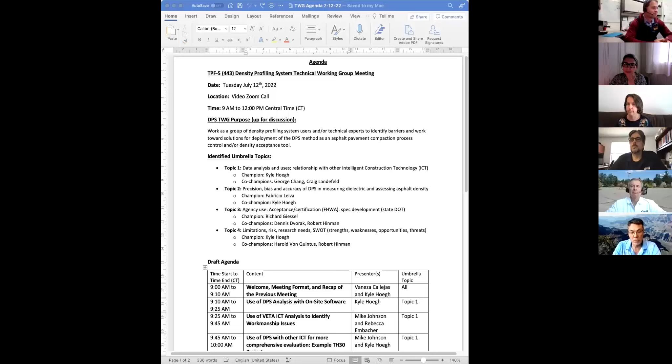Thanks Mercedes. Amanda. Hi, I'm Amanda Gilliland, and I am with the TransTech Group.

Thanks Amanda. Grant Courtney. Hi, I'm Grant. I'm a student worker under Kyle Hoegh and Mercedes.

Thanks Grant. Abbas. Abbas Tayavi from TransTech Group.

Thanks. Ulrich. I can't quite hear you.

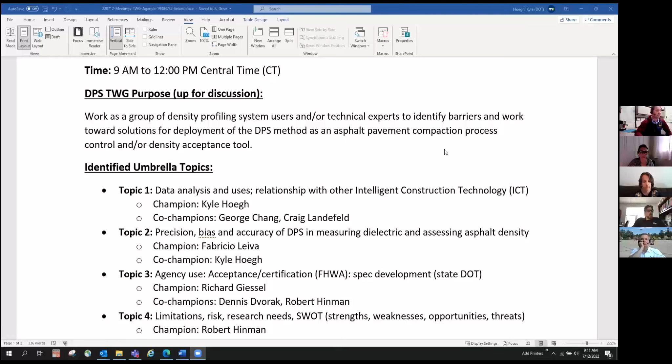Just a quick reminder that our goal is to work as a group of density profiling system users and technical experts to identify barriers and work towards solutions for deployment of the DPS method as an asphalt pavement compaction process control and/or density acceptance tool. In the last kickoff meeting, we did a polling exercise that CTC set up for us and identified these 4 topics, and then subsequently identified champions. So I'll be championing, along with George Chang and Craig Landefeld, the data analysis topic.

Fabricio Leiva from NCAT will be championing our precision and bias topic, topic number 2. Topic 3, Rich Giessel is our champion, and he's working with Dennis Dvorak and Robert Hinman. And then topic 4 is limitations, risk, research needs, strengths, weaknesses, opportunities, threats, and that'll be Robert Hinman championing that along with Harold Von Quintus and myself.

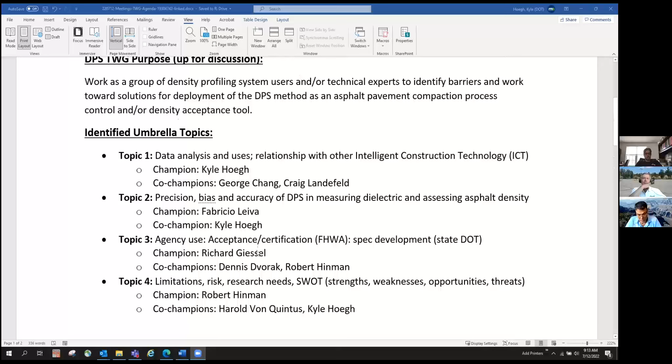So with that, I guess we could quickly open the recap from the previous meeting here. Let's see here. So a similar attendance to what we have today, I think around 30 or so of us. And we basically developed our purpose and identified, we had a couple presentations that Robert Hinman and I will be updating today.

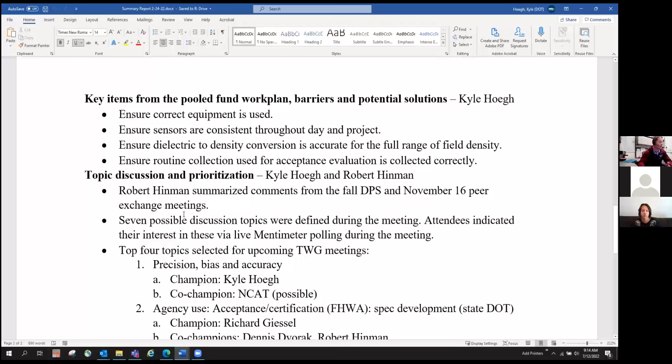But then the main point was identifying those 4 topics that I just shared with you. And then we came up with this meeting format where we're going to be focusing on specific topics with a presentation and discussion. And we'll discuss how that's working at the end of this meeting to see how we want to move forward to try to advance the technology.

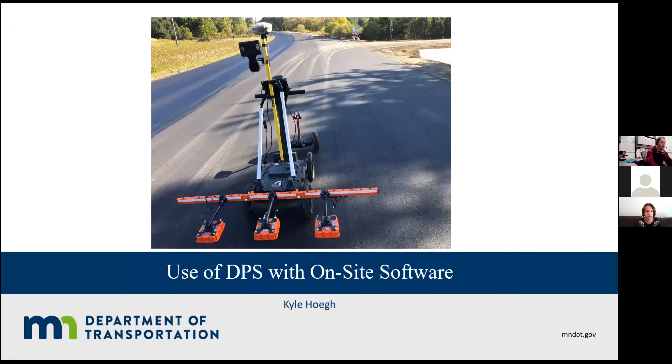So with that, I think we'll get into the presentations, and we're going to focus on topic 1 here initially, and that'll be myself, and then also Mike Johnson from Rebecca Embacher's group here will also be presenting as part of this topic. Okay, can you see my slide? Yes. Okay, so just to start with, before we get into some of the more advanced analysis that Mike Johnson is going to show, I wanted to first give an overview of the meat and potatoes of what we're trying to accomplish with DPS technology.

And really, it's pretty simple. We want a full coverage map of the placed asphalt density. And that can look similar to what we have here, which is a representation of the data in VETA or a Google KMZ file that is automatically created by the device each time you collect the data. But this is really what it boils down to: taking this device that measures dielectric continuously behind the final roller compactor and creating a map that gives us information about the density both across the width of the mat and longitudinally throughout the day.

So with that, Mike's going to get into some examples on this specific project and talk about how it ties in with some of the other intelligent construction technologies. This is just an example where paver stops manifest themselves in lower density locations, and then also looking a little more detailed at how variations of temperature throughout the mat, for example, can affect our density, but we're not going to go into detail of that yet.

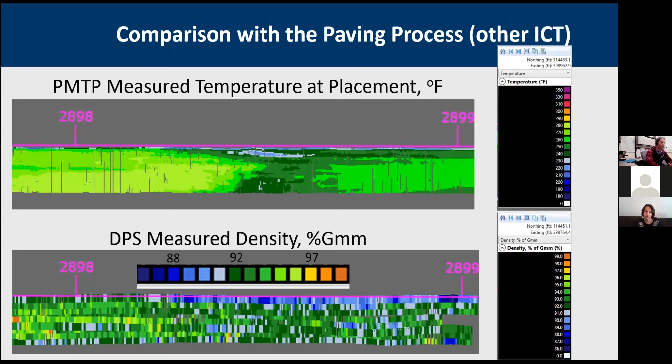One thing that's critical for this technology is training. This on-site analysis is something that could be very powerful for the use of this technology as a process control tool.

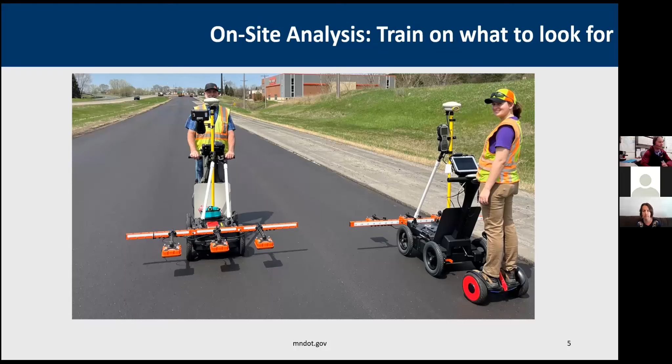I wanted to give this group an example of one of the first projects we were on this year, training a contractor on what to look for on the project and how this type of technology can be used with on-site feedback. We'll go into more detailed examples later.

What we've asked for as a group is the ability to take this technology and convert it to information that engineers are used to looking at when evaluating asphalt placed mat density. One of the tools developed with this technology is a simple way of categorizing the data so we can get a percent conforming result in real time while we're out there collecting the data.

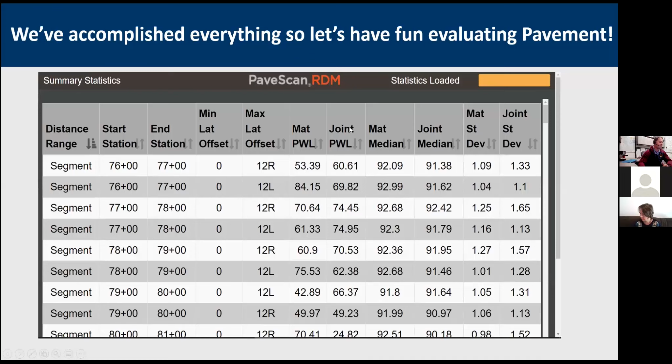I wanted to go through one example of how this type of information can be used. This percent conformance information can be categorized by mat or joint. At the beginning of the day, you'll see we're seeing a little bit lower than we'd like density on the right side of the longitudinal joint.

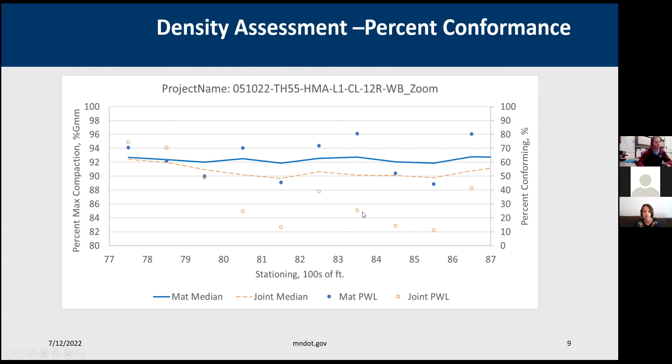One way we plot this: on the left side you see your average percent compaction for both the mat and the joint versus stationing. But more importantly, in my opinion, is what percentage of the mat and the joint is actually conforming to our standards for density. You see down around 10-20% in some cases here at the beginning of the day, around stations 83 through 86 especially, we're getting really low percent conformance at the joint.

Now let's move forward a little towards the end of the day and look at that data. This is what we started to see towards the end of the day, which is what we want to see: a higher percentage of our joint conforming to our standards for what we consider acceptable.

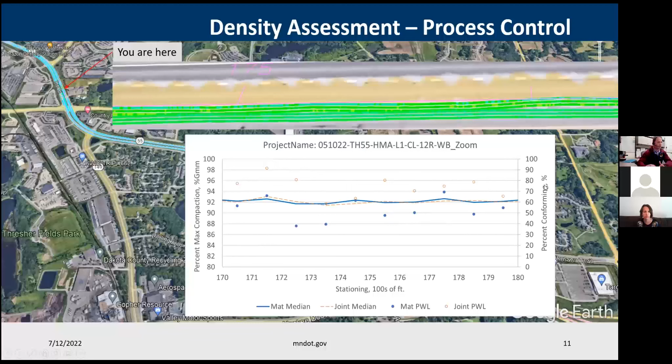So the question is, what changed? One thing I'll point out is that yes, we can do these fancy maps and do our analysis after the fact, but some of this information is readily available right away when you get out there with the technology.

This is Doug, the contractor, his first day on the job, and we hired him to push the cart for us. Basically what we told Doug at the beginning of the day is you get these three squiggly lines associated with your sensors. If you see one of these squiggly lines drop below the other two, take a look at what sensor that is and realize that corresponds to a drop in density. This is actually the sensor that was showing these lower density spots corresponding to the measurement close to the longitudinal joint in the right lane.

And this is echelon paving too, so this is not something that we want to see.

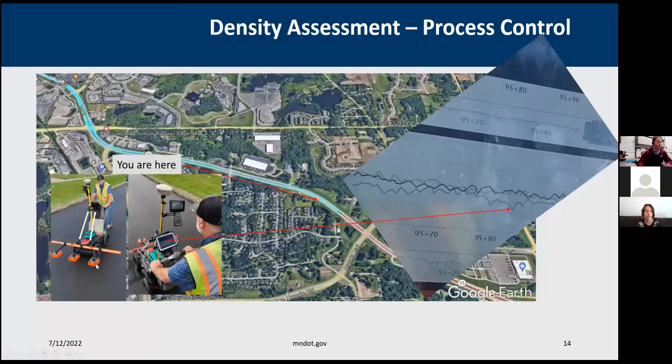So sure enough, the foreman came driving up and asked us, how are we doing today? How's our density looking? We explained that it looks really good, except for this spot on the right side of the longitudinal joint, and explained the data we're seeing coming in on the tablet. They took off and started talking to their breakdown roller operator and looking at their operation, and in this case I think maybe bridging across the lanes was causing that low spot.

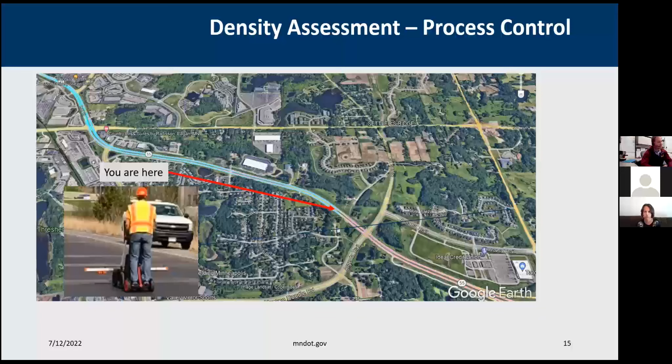But from our point of view, we don't really care what they changed in their operation. What we care about as an agency is that they changed from a really good mat, except for that specific location, to fixing even that spot that was showing low density on the right lane, right side of the joint on echelon paving.

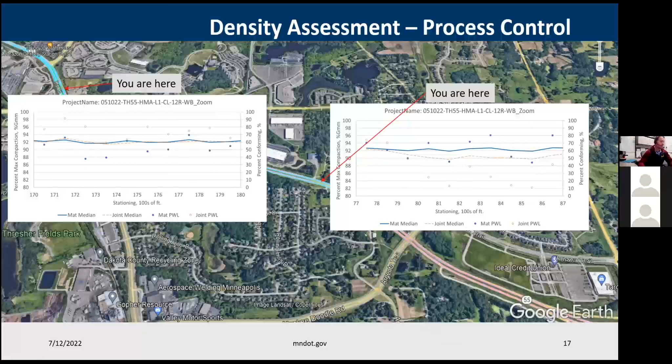That's just a small sample, a small change, but you can see this makes a huge difference on the percent conforming. I'd argue this makes a huge difference on how long that pavement is going to last, and who knows if and when that change would have been made without this type of technology readily available.

This is something a first-time user of this technology can readily identify. That's what I wanted to emphasize: the value of this type of technology, and getting it in the hands of contractors to try to use it to improve our operations.

So Mike, we're going to introduce here now to give us a little more detailed analysis, and this is more stuff we can do after the fact. This is looking at a project where I saw lower density - again a pretty good project overall - but I started to see some lower density here, specifically in this area starting at around station 141.

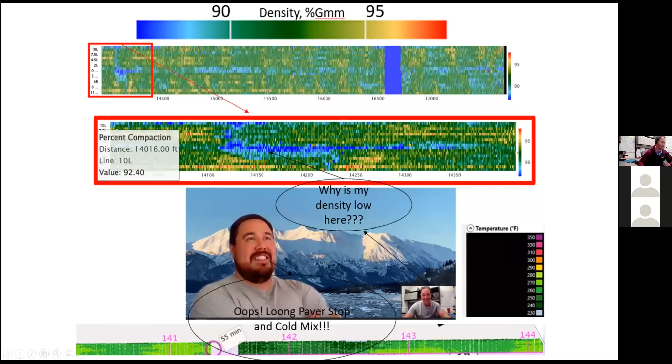Looking further into this data, you can actually see, in addition to this 55-minute paver stop, in the other lane a little 2-minute stop, and then a 49-minute stop. Sure enough, that also corresponds to the other issue we had with low density, down below 90% GMM, all the way across the joint here, corresponding with this paver stop, and all the way across the lane in both lanes, corresponding to these paver stops.

It can be further broken down to the temperature at the breakdown roller, where you see the low temperatures by the time the final roller - this is not something you want to see - by the time the breakdown roller actually got there. This is of course what we get when that happens in terms of low density occurring when we have a low temperature at the breakdown rollers.

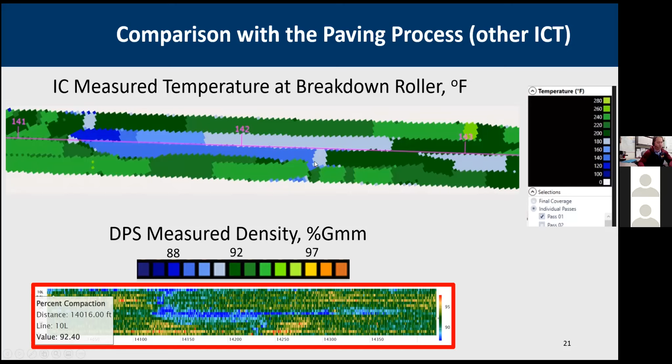So I want to thank you for your time with my presentation here, and then hand it over to Mike to talk a little more about the use of Veta, and then we'll bring everything together with DPS and Veta after that. I'm going to stop sharing my screen now and hand it over to you, Mike.

Okay, so I have a PowerPoint. We've been using intelligent compaction and paver-mount thermal profiling. We've been at full deployment for about 4 years, and since we've been using these technologies for quite a while, we've been able to identify cases of lower densities, and then we'll tie this into the dielectric profiling system data here.

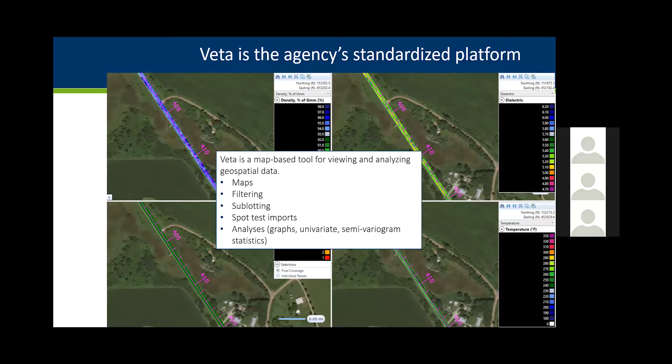Again, during the intros, I think George did a quick little intro on Veta, but I'll briefly touch on this as well. Originally we had several different intelligent construction technologies with a number of different vendors, so there was a need for one system to see all this data. Veta became that system - it's a standardized platform for viewing and analyzing geospatial data, with maps, filters, sublots, spot tests, and some analysis. I'm going to show you all those things here after the PowerPoint.

Okay, so the Veta software, what we have on the left here, as I mentioned before, are several technologies, the same colored bubbles. As long as that data is in the AASHTO MP39 format, or there's an API put together, it can go into Veta, and then we can view and do all the analysis on those technologies.

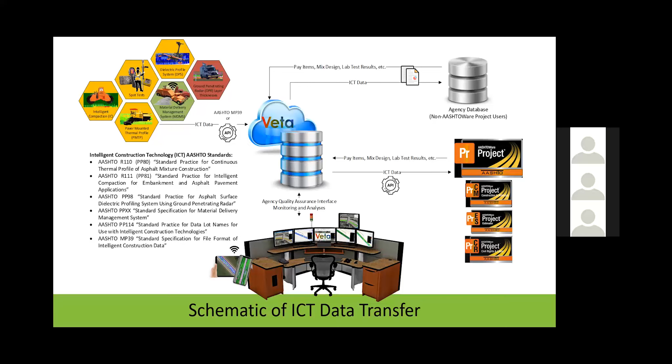So you've seen some screenshots from Kyle's presentation, several of them were from Veta. This is just another example here. As I mentioned before, paver mount thermal profiling and intelligent compaction are already technologies in the Veta software. Paver mount thermal profiling is in the middle, intelligent compaction here at the bottom.

And at the top, we're in the process of funding the material delivery management system. Sorry if I didn't explain it before, but that's the expanded version of e-ticketing. So once that's all in there, we have an opportunity to track the trucks, and it'll be a lot easier to identify changes in mix design.

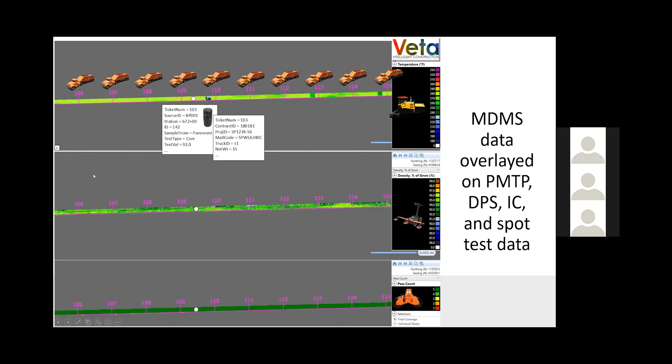Just a couple notes here: dump locations, and we can identify the moments when we need to adjust calibration curves, which is related to the DPS system. So having these other technologies in here will help you identify and also organize your DPS data.

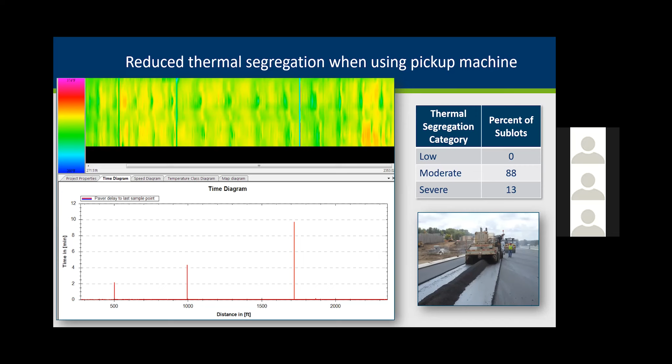We've been recommending for quite a while that contractors use a pickup machine or something to remix the material. On that same project, they grabbed a pickup machine and those paver stops became less of an issue. You can see significantly less variability in the paver mount thermal profiling data up top, and much shorter paver stop times. In this example, the worst one was only 10 minutes. You can see the difference.

So touching on this, I mean, most paver stops are preventable with changes to the operation.

We were able to identify some instances where we had increased localized area roughness with our profile data, and then we went back and looked at our paver mount thermal profiling data, and we were able to line up almost perfectly some paver stops. Those were lining up in that instance, depending on the contractor's operation. Sometimes those are apparent and sometimes they're not. So it's not obvious out in the field when you will get an area of increased roughness or not.

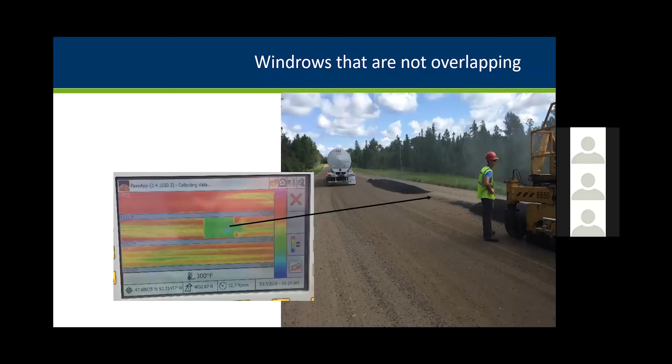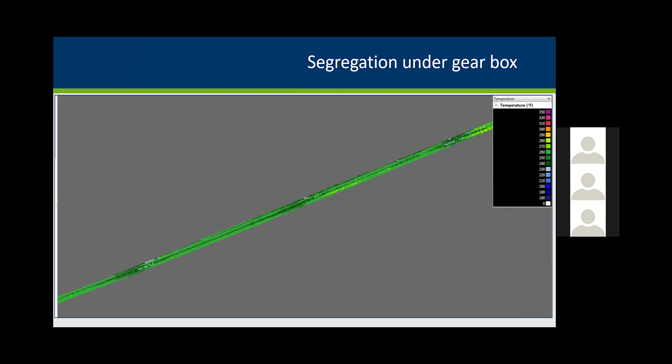Other issues we identified is segregation under the gearbox. As that material is fed through the paver, it goes down 2 slat conveyors, and then the gearbox pushes it out in front of the screed. What you see is that there's this strip of cooler material that ends up sitting right there at the center where the gearbox is. This screenshot shows you right down the middle, there's a strip of cooler material.

Other instances we've identified is trucks driving over the windrows. This pushes that material down, the pickup machine can't pick it up as well, and then you don't get full thickness of the lift - some cool material mixes or gets paved over. What happens is that you get some cooler material show up here in the mat.

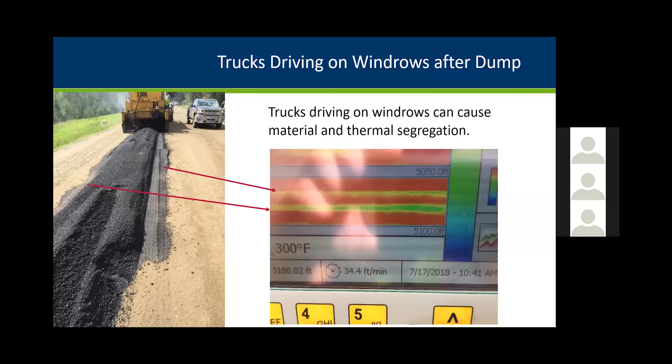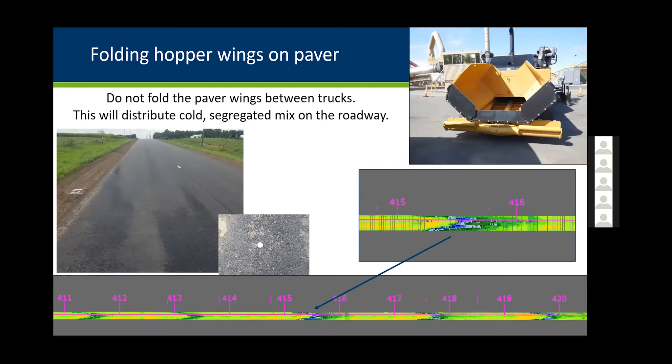Folding of paver wings - we see this. I've seen it driving down the roads a number of times. What happens is cooler material collects on the side of the hopper. At the end of a load or a dump, they'll fold the wings, and that colder material will go through the paver and turn into this V shape in the thermal data, as you can see in the zoomed-in version on the right, and overall on the left. These may be visible, and you can even see in the zoomed-in picture with a quarter where you could see the aggregate.

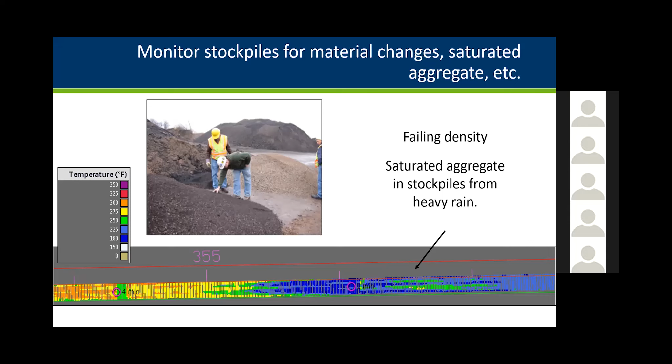Similar deal, this is a rain that happened overnight, and then a stockpile got saturated. At the plant, they just picked up that saturated stockpile and sent it through the plant, and that saturated aggregate did not warm up and did not make it to the site at a reasonable temperature.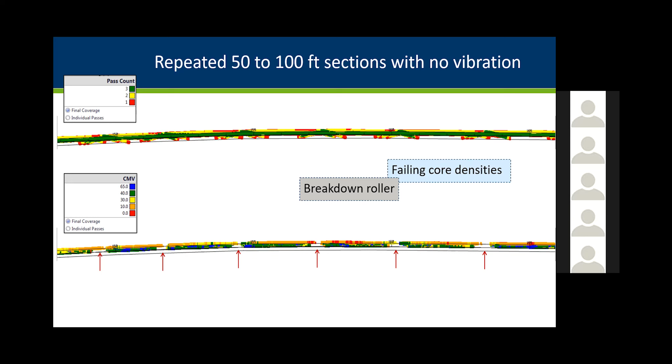instruments on that intelligent construction roller, one is the stiffness values we're receiving. In this instance, it's in CMV units. And what happened is these areas where there's no color indicates there was no vibratory compaction occurring. So as the roller was compacting, they'd turn off the vibes and roll off, and then they'd roll back on and turn the vibration back on. What happened is these areas never got hit with vibration, and they corresponded with some failing cores.

Other issues we've observed is just the rolling operation itself. With this system, there is a screen that the operator can see, and they can see where they've rolled, instantaneously mapped. But prior to that, these contractors, an operator would start compacting and go until they see the first tumbleweed, and they'd stop and go back to another preset area, back and forth. And over time they miss areas.

You could see that this example here on the top is the number of passes that this breakdown roller had. There's a number of areas, especially towards center line, where there was only one pass by the breakdown roller. So it's going to be challenging to get density when there's only one pass from the breakdown roller.

Other examples we've had: up in the top left is some asphalt that failed, and that was fairly immediate - I guess there's no striping there, so it was immediately after construction. This asphalt just started failing, and what you could see with this Veta software is you can turn on the aerial map, and you could see that this road went through a boggy marsh area. Based off of the legend on the top right, this Trimble CMV is a stiffness value, so there was significantly lower stiffness values in this stretch, and that corresponds to the failure area.

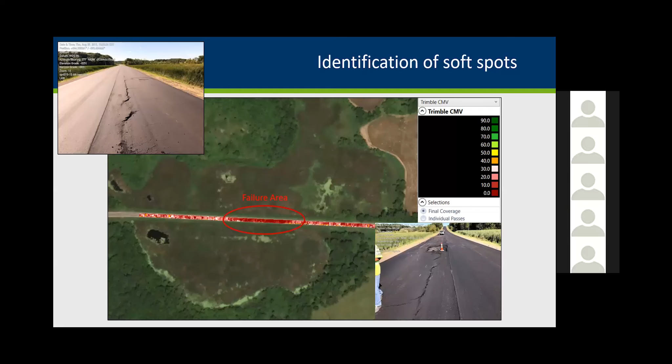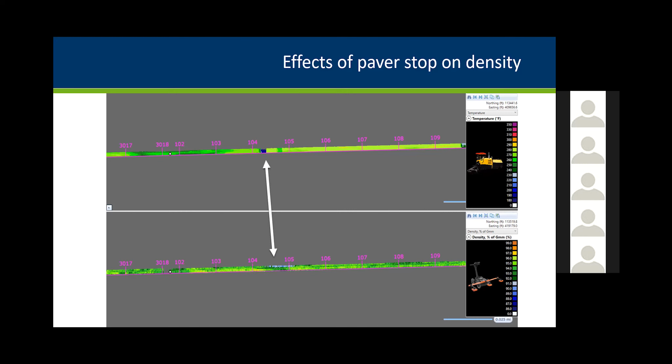And then I think Kyle had some similar screenshots here, but basically paver stop at the top and then lower density on the dielectric profiling system here in the bottom. That reoccurred over and over. I think Kyle had this screenshot, and then Kyle had a zoomed in version of this left one right here as well.

So that's just about the end. Again, more correlations of paver mount thermal profiling data, and then lower density in the dielectric profiling system.

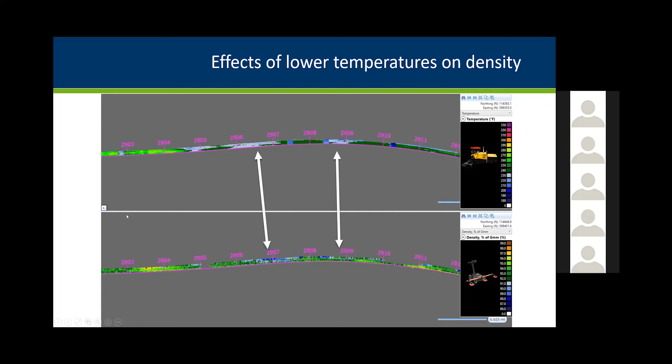Let me bring over my Veta software. Haven't been paying attention to the time, but hopefully in 10 or 15 minutes before this Zoom meeting gets cut off again. This is one of the projects. Well, hey Mike, actually, we're back in business with the Zoom meeting. Oh, so we don't have to worry about that anymore. Okay, well that's great news.

Yep, all right, so this is the Veta software. This is one of the projects where we had intelligent compaction, paver mount thermal profiling, and either Kyle or someone on his team, or even they hired out a contractor, to collect DPS data here. So this is in the Veta software. There's all sorts of other classes and training that TransTech Group can provide about creating these filters and taking care of the data and importing it all. There's a number of steps to get to this process, is all I'm saying.

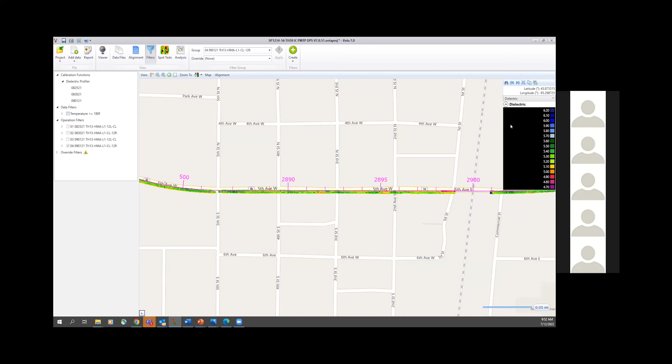Right now, bring your attention to the legend in the top right. We have pure dielectric data here, and I can switch to instantly view dielectric values on the viewer. Kyle had calibrations that he provided to us, which we can now use to get density values. There's also a number of other options we can look at: dielectric height, quality, speed of collection, and the opposite of density, air voids. So that's what we're seeing on this screen.

One note for the group: if you look at that legend, it's the opposite of what a lot of you are used to with density, where in this case the cooler colors are higher density and the warmer colors, the reddish and orangish, are lower. This legend is fully customizable, I can add as many increments as I want. Part of the challenge is making the color scale make sense when you actually see it in the viewer. So blue is good, red is bad. That's what we're looking at right now.

Can I add on to that? Kyle and I inverted the scale this direction because it was extremely confusing looking at the DPS data with respect to thermal data and intelligent compaction data when the color scales were inverted from each other. It's a lot easier to pan through temperatures for thermal profiling and intelligent compaction, and then also look at the DPS when the color palettes match. That's why we inverted it, otherwise you had to keep flipping it in your head as you looked at each one, figuring out what was more of a concern versus less of a concern.

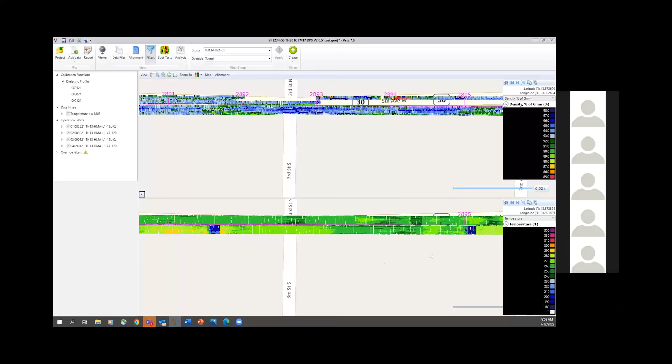I have one more thing I got to point out here, and then I think I got to move to analysis here before I run out of time.

So again, down here on the thermal data, what we have is there's this cooler strip of data on the edge. And then up here on the DPS data, you can see the corresponding lower DPS values. So again, there's some good correlations here.

These were just a couple examples that I had ready to go this time.

These are all the different data types that we can view based on the technology. So again, I went over the list for dielectric profiler system, but for the thermal profiling, we got speed and temperature. And then for the compactor, we got pass count, speed, temperature change, stiffness, frequency, amplitude, impacts per foot. So we could see all these different data types, and right here in the Veta software, do our comparison.

So I'm going to switch to analysis here and show that to you before we stop. And I think I have this preloaded here. One of the suggestions we had was just the

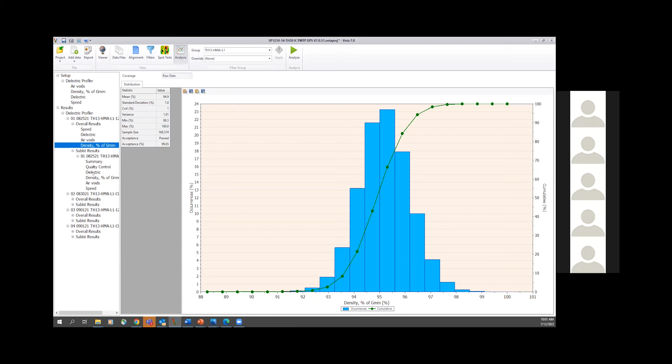This software can also slice and dice these entire lots into what we call sublots. I had the settings at 150 feet, which matches our paver mount thermal profiling. So I can go here and now I can view

Oh, there's no DPS data for that first little bit. But I could view this DPS data here. So this red rectangle here indicates the sublot that I'm looking at based on the chart that I have.

And we have, this is the percent within limits that this one passed. It was 99.8% of the dielectric data was over the 92% threshold. So, and then again, the statistics on min, max, mean of the densities.

And then we can get a chart of the acceptance. Again, this first 8,000 feet, there is no DPS data to make the comparison. But over here, there is DPS data, and it was all of these 150-foot sublots that passed our test here.

So some of these other lots are not so much. So I can see that, you know, we have a number of, each bar is 150 feet. So there's a number of sublots that just didn't have the 92%. So I can see that same information here in the table and scroll down. So this was 78. Only 78% was above 92, had a density of 92 or higher.

So sorry, I keep lots of percentages here, but you can kind of see just on the viewer, there's more variability in the densities based on the legend here on the right.

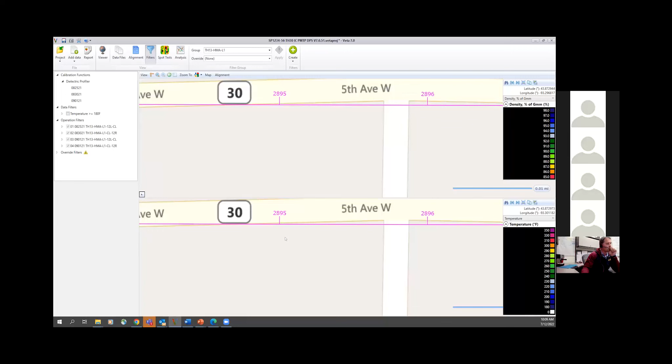But I think we are getting the accuracy left, right. There are some vendors where the receiver compared to where the data is scanned is shifted, so there might be some longitudinal differences in the data. If I scrolled over to those paver stops, you'd see the paver stop for thermal was at 2895, and then you could see it's almost an additional 10 feet shifted for the DPS. So there is a little bit of longitudinal difference for our thermal data.

But now that all these technologies are compared to each other, we're starting to see a little bit more of those differences, but independently that isn't impacting our incentives, disincentives, and requirements for any individual technology.

So the other question Rich Giesel had is, what is dielectric height? That's just the height above the pavement that the sensors are. The reason that's included is if you have a height that's out of tolerance in terms of the distance between the sensor and the surface, that can affect our dielectric accuracy. So that's the reason we're tracking that.

And I forgot to ask Rob, did Mike and I answer your question? Yes. Okay, did a great job. Okay, and then Rich Giesel, how about your question? Does that make sense?

Yeah, I just would have called it sensor height, I guess. I wasn't connecting dielectric and height as the height of the sensor.

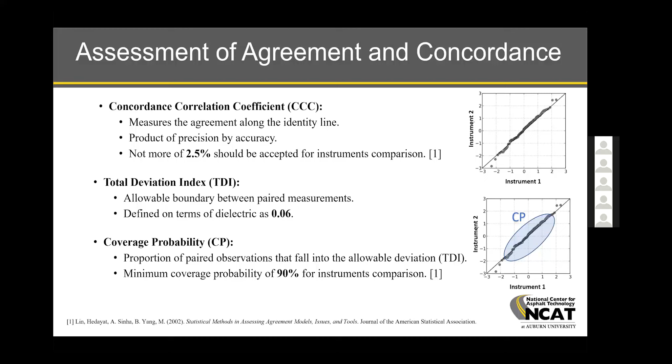In order to do that, we prepared compacted samples using two different mixtures. One was a 9.5 millimeter dense graded mix, and we also had a 19 millimeter coarse graded mix, just to have different mixtures we could compare for a wider spectrum of results. At the same time, we created compacted samples at four different levels: 3%, 6%, 9%, and 12%. For all of them, we obtained dielectric values following the standard protocol.

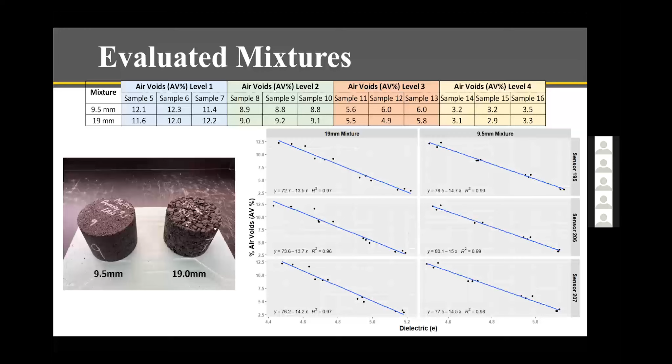Here I'm just going to show what we did initially with three different sensors we had available. We wanted to compare those two mixes, plus another trial mix we had in the lab that we used to learn how to operate the equipment. When comparing several of those sensors across all three mixes, we were able to meet all the parameters: we wanted to be above 97.5% on the concordance correlation, below 0.06 on the TDI index, and above 90% or 0.90 on coverage probability.

So basically what this is telling us is when we compare sensor 207 versus 206, or one sensor versus the other, across all three mixes, all of them were showing similarities in a statistically significant way that we were able to prove.

We did find out later on that the 19 millimeter mix was a little bit tricky to deal with. And then we decided to split the results. So now here I'm showing...

more sensors that we had at that time. We had later on 6, and then we sent those samples to MnDOT and Kyle's group. They were able to also test the same samples, and we added more. But here I'm showing 6 different sensors that we had, and we separated those 2 mixes.

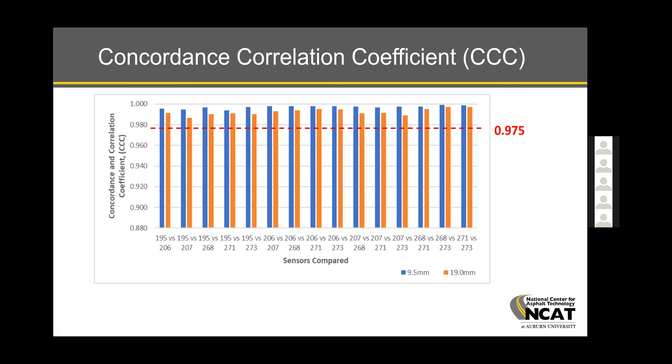And we noticed that the 19mm mix was showing us slightly lower results, and that sort of makes sense, because we were observing a little bit more variability on the results with the 19mm.

When we went and checked the total deviation index, we found a couple of instances where we pretty much failed one, and the other one was right at the range that we were expecting, and that led us to do more investigation of what was happening with those mixes.

And basically we found that at the high level of air voids, the 12%, we had several samples with a lot of variability, and it was difficult to obtain repeatable results.

We observed that with all the different sensors, and you can see that in most cases the 19mm was showing higher values, which in this case we don't want to go above 0.06. And for the 9.5mm, every single pair passed that criteria.

The coverage probability is going to show us the same results as before. In this case, it's more easy to identify that this pair also had an issue.

And again, we went back. It was the 19mm. We identified a couple of samples that were behaving differently. It was just that we couldn't get repeatable values, and we were thinking maybe it's the texture of the mix.

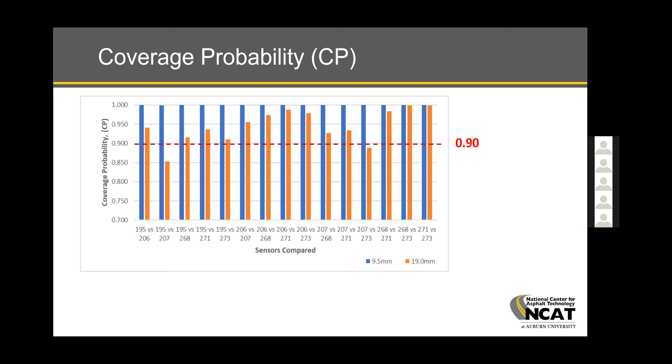this erratic behavior, and we believe that may be a limitation in terms of establishing what is the maximum level that we want to evaluate in the lab.

And here what I'm showing is that we also performed some outlier analysis. We noticed that there's a little bit more scattered results when comparing a couple of sensors in the 19mm mix. And then when we went and evaluated, having an average of both sensors versus the difference, and

establishing a range that we can use as the limit to identify the outliers, we found that's what was happening at the lowest dielectric values, which of course are also the high air void samples. We were able to identify that that was the same behavior every single time with a couple

of samples. And we were failing a couple of those criteria. And after removing those outliers,

considering that there was something going on with that, we cannot simply eliminate data points. We had to justify those, and we decided, well, yes, that is something that we can do. And after eliminating some of those outliers, we were able to get back to, or at least pass, those different criteria.

For this, we developed a web application where you can pretty much create a CSV file, identifying one instrument versus the other, one sensor versus another.

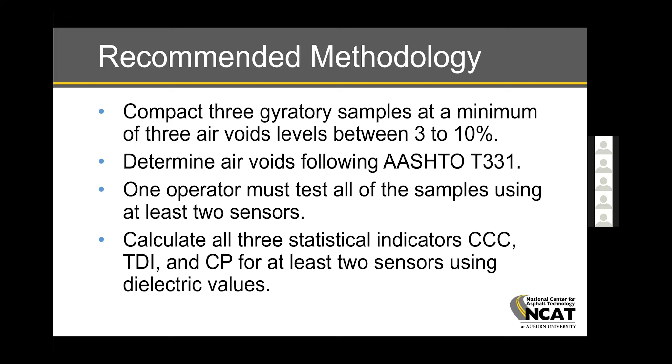Also conduct some outlier analysis, investigate the source, and adjust the analysis accordingly. And if those three items meet the respective criteria, then we can say that the operator and equipment can be certified.

Okay, so that's basically what we have in terms of laboratory. We can also use this methodology to evaluate if there's going to be some bias, and the same samples were sent out to... I'm sorry, it was the lab. Turner Fairbank. That one, thank you very much.

And they were able to evaluate the same samples with their own sensors, and they were able to identify, as you can see here, there's some bias between sensor 194 and 211, and that's what's repeated with other sensors. So 194 was showing exactly this behavior, a slight deviation from the equality line.

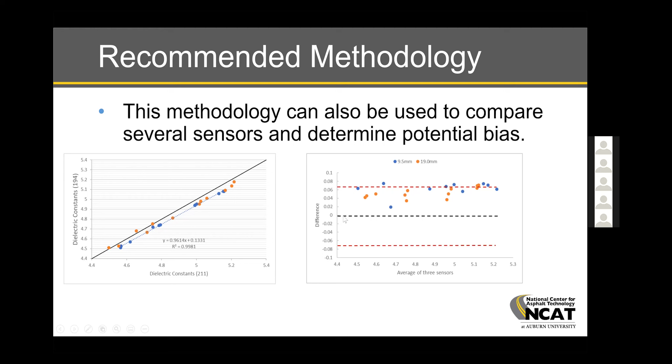And at the end, when you plot the same, using the methodology we've established to measure potential outliers, you can see that everything tends to go to one side. What we would like to see is something scattered around the zero value. So that was another way to utilize the recommended methodology.

All right, next we have this proposed field certification program, which basically follows closely what was done with AASHTO R56 for inertial profilers, to establish accuracy and repeatability between sensors or among sensors. In this case, we didn't have a large database similar to what was done in AASHTO R56.

So we had to generate artificial profiles. We generated reference profiles, and we generated candidate profiles, following something similar to AASHTO R56.

In this case, we also decided to utilize a simple score system using the root mean square percent error, which is easy to identify. We're looking for a percent or a score, similar to what is done in R56. Basically we're using the root mean square percent error, and if we subtract from 100, you can obtain a score.

As I said before, we created artificial profiles, following a 400-foot section. We created a reference profile, and then we started to add variability by a standard deviation, plus or minus, and created different scores based on that. If it was a score of 100, we were pretty much matching the reference and the candidate profiles, and with some deviation you'll start to see a lower score.

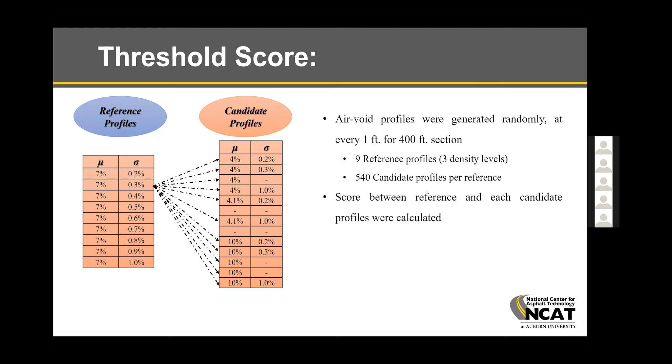So we generated randomly readings of air-void values. We had 9 reference profiles at 3 different levels, 4, 7, and 10 percent. For each of those, we have around 540 candidate profiles per reference, and we had the end scores between reference and each candidate profile. Here's basically what we end up at the end.

We considered all the different distresses and how having all those different differences in air-void values were going to affect performance.

And at the end, we come up with this scoring system, which basically, for accuracy, when we're evaluating a new device or we want to provide a certification for a device and an operator in the field, we recommend that for accuracy there has to be an agreement of about 92%. Basically that's the score that we are asking, similar to what we do with inertial profilers.

So in that case, that will be less than 10% error in predictive performance in at least 95% of the comparisons. And for repeatability, an agreement of 94, or a score minimum of 94, and that will provide us 5% error or less.

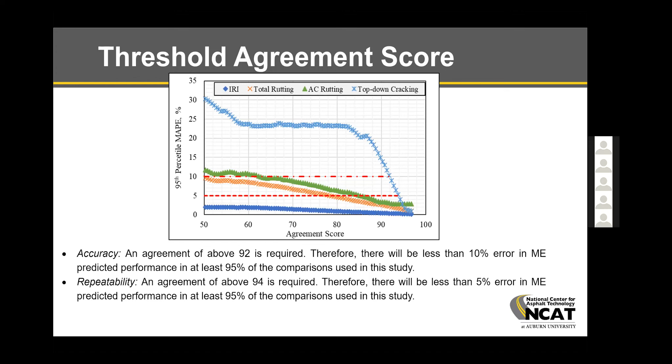We basically established three different levels of air voids, 7%, 4%, and 10%, and generated artificial profiles for each of those density levels. Randomly we generated this profile for 4%, one for 10%, and for each one we created candidate profiles, adding standard deviation up and down, plus or minus.

In this case, you can see here is the case that we had minus, but the idea was to add some differences between the reference and the candidate profiles, and evaluate what the effect was on performance, and to compute the score based on simulated performance.

While we've got you, Fabricio, taking a break from the presentation, the other question I had was for the group, but mostly for you, about getting the tools you're presenting available for use by the DPS pooled fund. I can't remember, did we decide we're going to have them posted on our website with a short tutorial?

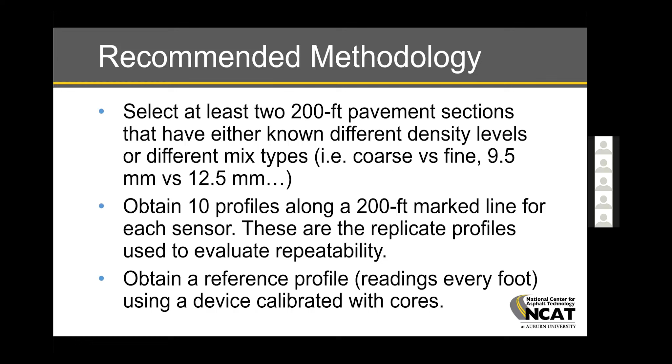And then we can obtain a reference profile, as I said, having another device that can be correlated with cores in a more practical way. And then basically generate CSV files for the reference, and another file for the candidate profiles, and use the Excel tool to compute accuracy and repeatability scores.

In the case of inertial profilers, you do that with ProVAL, the software that was generated by the same group, I think, from Beta, but it's the same sort of idea, having those candidate and reference profiles evaluated in an application that can allow you to compute accuracy and repeatability scores, and from that establish if the certification applies for field testing.

Next, briefly, I'm going to go through precision and bias statements that we developed at NCAT. At that time, we had 9 sensors. We basically follow ASTM E691. Here I'm showing one of the checks that we need to conduct with the H and K consistency statistics. In this case, pretty much we were able to meet all those. In some instances, we were close to marginal, but following the practice, we were fine. And these are for pucks evaluated in the lab.

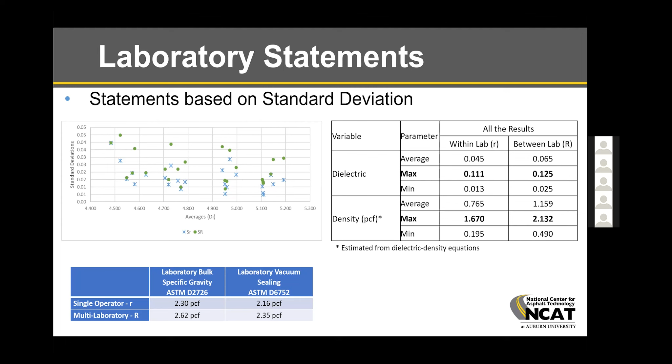Now in terms of field statements, we have 6 sensors. That's the minimum we can utilize to obtain the statements. In this case, we use 8 sections at the test track that were built last year. We also evaluated, measuring at the joint, and we measure within each of the sections. We also follow ASTM E691, and we check H and K consistency statistics.

We wanted to evaluate or compare whether there was going to be any joint effects in terms of the statements, because if that was the case, we would have to generate individual or dedicated statements when measuring density at the joints. In some cases, we were able to observe that the joint, when measuring the dielectric values at the joint, was slightly below compared to other locations within the section. But in other cases, we didn't observe differences. So we wanted to evaluate even more to see if there was a need to separate field statements with respect to the joint versus the rest of the section.

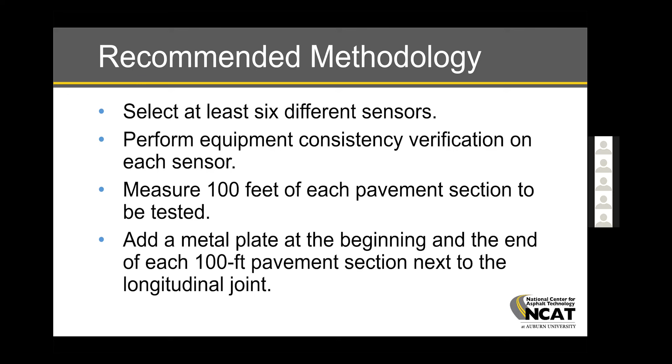And what is the recommended methodology in this case? Well, select at least 6 different sensors, which is the minimum established by ASTM. We would like to perform equipment consistency verification on each sensor, following the testing protocol. We recommend 100 feet of any pavement section to be tested. We added a metal plate to establish the beginning and end, but any means available to clearly define the beginning and end of the section is valid. Sometimes GPS is not that accurate, but when you add a metal plate, you have full reflection, and it's easy to identify that peak value when you start and finish the section.

Basically place one sensor 6 inches from the longitudinal joint, and then place another sensor. You can have more sensors if you're capable, along the transverse bar if you're using GSSI technology, and obtain at least 3 replicates for each location, joint or otherwise within the section. Then follow ASTM E691 to determine adequacy of the data and determine statements. We can also continue evaluating for outliers or other ways to identify any potential effects, either at the joint or other potential locations.

We also evaluated the edge of the pavement, and we had several sections with values or profiles measured near the edge, and there was no significant effect or differences compared to other locations within the pavement section.

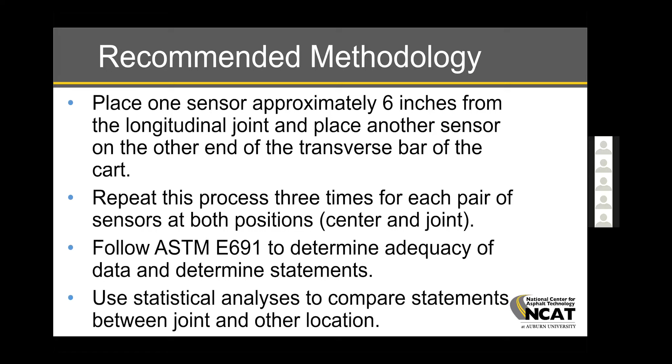And with that, I pretty much wanted to thank you, and I hope to continue providing more information and working with this exciting technology in the future in terms of density readings and performance. Thanks.

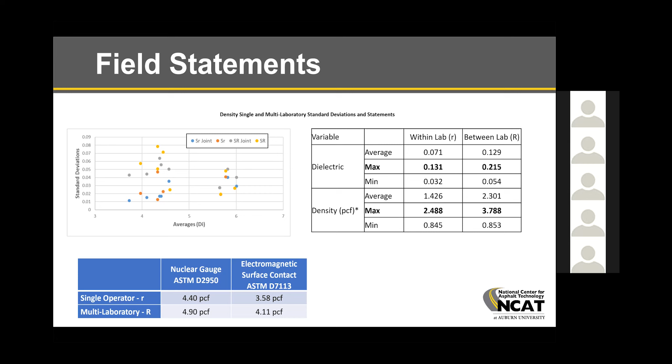Yeah, and I don't know, the only thing I heard on my end when we got to this slide from you, Rob, was impressive results. Did you say anything before that? No, I was looking at the different AASHTO test methods for cores and CoreLok and for calculating density, and I was just trying to get a flavor for where things were at from the field versus lab setting there too. And so, I mean, it's impressive results.

And one thing I think we'll do with our testing in August at MnROAD, in addition to creating those reference profiles and repeating Fabricio's measurements there, is we'll also be doing precision and bias testing following Fabricio's protocols. We've actually already done that on existing pavement. And I'll be interested to see if we can get on the pavement as quickly as possible after it's paved to see what the difference in precision is right after construction versus waiting a few days. Because my understanding, Fabricio, is this pavement was recently paved, but it wasn't right behind the final roller when you did this testing. Is that correct? Well, yeah, we had to wait a couple hours at least.

Oh, okay, so it was same day though. Yes. Yeah. Okay, good.

Yeah, so it'll be interesting to see the effect of that. And then I guess one question for the group: is there anything, since we have the opportunity to try to replicate this experiment at MnROAD, that you'd like to see us incorporate with our testing that comes to mind?

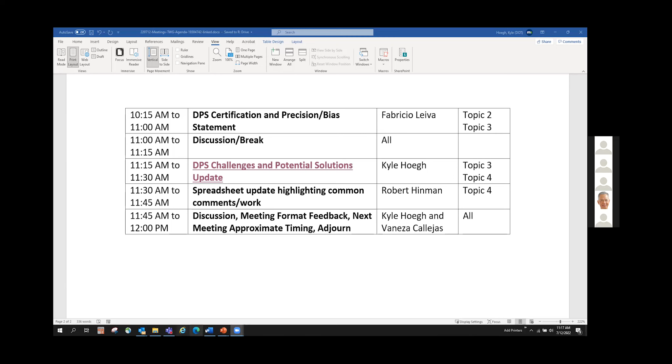So I'll now pull up my presentation. Can you guys see my slide? Yes, we can. Okay.

This presentation actually I gave with Dennis at the previous technical working group meeting, but he wasn't able to make this meeting today, so I'll be giving it without him. But the basic point is that when we're looking at using DPS as an acceptance method, we're looking at doing it in various different ways that all have their unique challenges and potential solutions.

One solution might be similar to what Rich is looking at in Alaska, where the agency is using the DPS for the testing. One might be more similar to what Minnesota or Ohio might be looking at, which is contractor DPS verified by an agency DPS, and then of course verified by cores too. So we're going to look at a few of the challenges associated with all these different techniques, and give an update on what we've been doing to try to address some of them.

One thing I always note on this presentation when you talk about challenges is just remembering the potential and the goal, which is a much needed improvement in how we do our assessments of HMA density. These are challenges that, in my opinion, are worth putting our time, effort, and resources towards addressing.

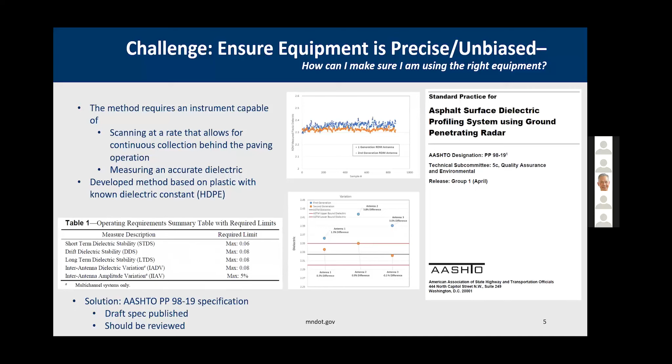There's been a couple iterations back and forth in terms of sending the specification and getting comments back from Kurt and his committee. But basically we took what was written a bit too much like a research report or even a publication, and tried to simplify it as much as possible to make it more of a typical AASHTO spec, where we're specifying the procedure and then these measures.

That I'm giving here in the table are basically based on Fabricio's work on tasks 2 and 3 as part of our pooled fund, where we have these different measures that make sure the equipment is good. These would be the type of measures that the manufacturers would be in charge of making sure that their equipment is hitting these necessary limits of statistical measures, to make sure the technology is accurate, unbiased, and precise in measuring dielectric of gyratory compacted specimens.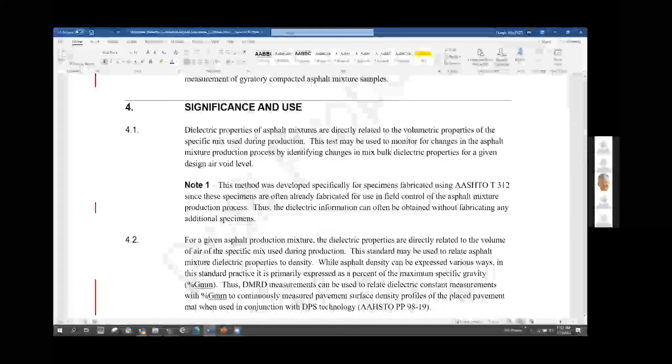Like I said, we have a draft specification that is going through various iterations, but we hope to have that draft specification published as soon as this year or maybe next. So the next topic is the sensor consistency throughout the day, and then also from day to day for the same sensor.

What we've been doing up to this year has been basically using swerve or repeat line tests to make sure our sensors are consistent relative to one another. And what we had listed last time at the beginning of this year was a possible future material closer to the AC range that we could use for our consistency check, and also a standardization.

The HDPE that we initially started to evaluate was just too low of a dielectric compared to our asphalt, which is up around 5, 6, 7, as compared to the HDPE, which is down around 2.3 to 2.35.

So just an update there. We've been testing this year with this new fiberglass material and seen really good results so far. And what I mean by really good results is we have a standard value that we know this technology, or this piece of material, should have in terms of dielectric result.

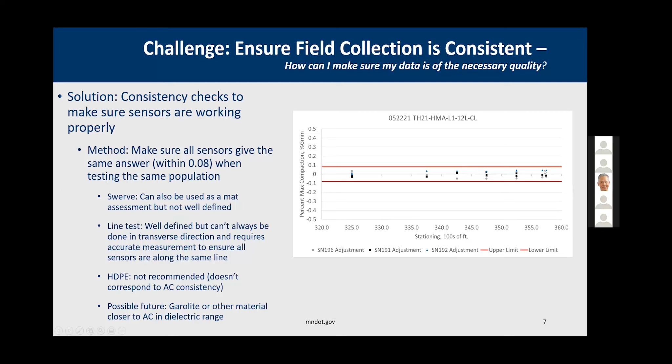The reason that's important is that we had specified doing these consistency checks throughout the day, and have seen enough consistency with our sensors that we're just specifying it at the beginning and end of the day now. But you want something, if you're going to have a standard material for this type of stuff, that you can bring out with you to the field each day, just to make sure your sensors are measuring consistent to themselves, and then also over time.

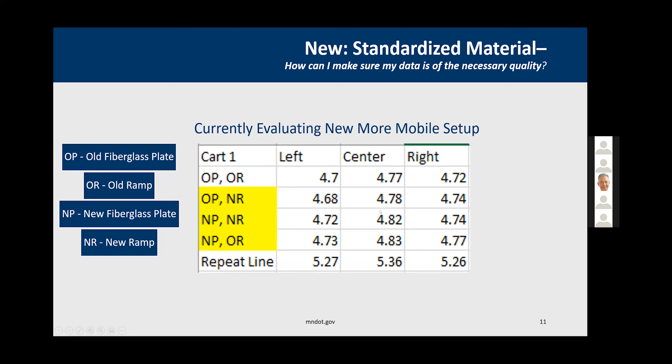And then this is just making sure we're running through our new fiberglass with the new ramps through the same protocol, comparing it to the old ramp and old fiberglass for consistency purposes. So that's something that we'll have a more detailed report on later.

So this is basically what we've been doing in the field, is going out with our custom material, checking that our sensors are good relative to each other and the standard reference. And now we're standardized to our known dielectric value each day when we go out there to test on the project.

And then of course we still do our swerve and repeat lines so we can make sure - okay, if the left sensor is measuring a little bit low and needs to be increased relative to the rest, or the right sensor is measuring high and needs to be decreased relative to the rest - for the standardization, it's showing up both in our swerve and our custom material to make sure those are consistent.

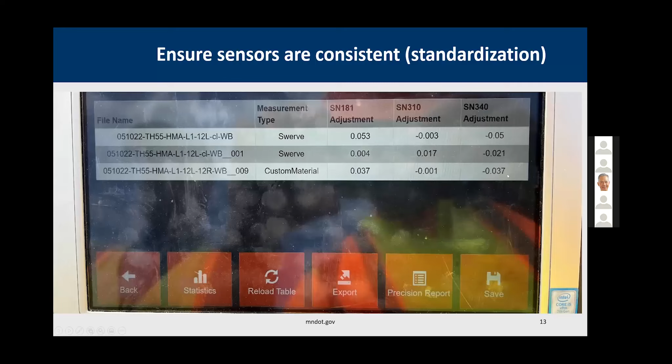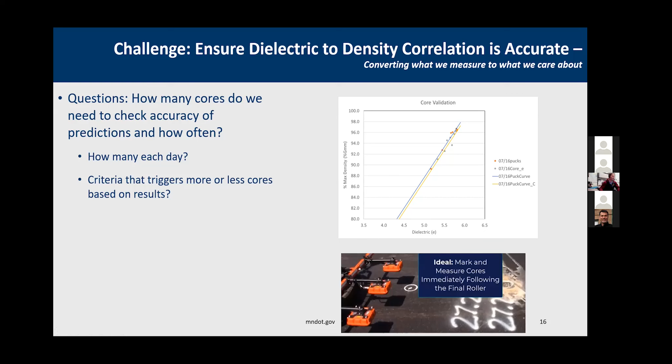The one thing I wanted to mention is how we actually check the accuracy of our conversion. We've been doing spot checks at the core locations prior to them being cut, and we're looking into just doing our routine full coverage assessment and comparing it to the cores after the fact, which would require a high accuracy GPS for both the core locations and the DPS measurements. That's what's presented here on this slide.

One thing I wanted to mention is that UNH has been working on a statistical acceptance criteria for comparing our cores to our conversion using the gyratory samples.

So the next question is, first of all, how do we eliminate this from happening, where we see a bias in what we're measuring out in the field in terms of our cores versus our predictions from the gyratory specimens? The good news is we don't often see this type of result, but it does still show up periodically. That's one thing we're hopeful we're addressing with this standardized material, to make sure if we are measuring lower, that'll be taken care of by standardizing to that fiberglass specimen.

But we do need to have a procedure in place for what to do if something like this happens while we're deploying this technology. Again, UNH is looking at the process to make recommendations there.

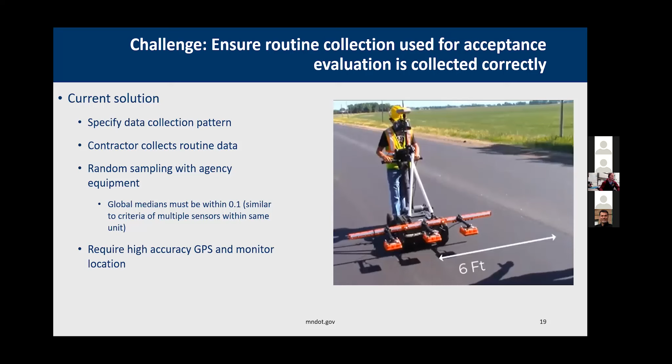The routine data collection, the one thing I wanted to touch on before giving the floor to Rob is that the simple push cart is doable, but from a deployable standpoint, we've gotten feedback from the contractor that we may need some advancements there. That's one thing we're looking at, that we demonstrated at our training event this past spring, looking into whether it's robotics or other ways of getting our full coverage lines of data, or even a Segway-type procedure to push the cart. Getting those 9 lines of continuous data across the lane is a critical aspect in being able to deploy this technology, is how exactly that gets done.

And then, of course, our ability as an agency to do routine checks on contractor collected data, to make sure that the data being collected is in fact following our protocols and is unbiased and correct.

So with that, I think I'll stop sharing my screen and give the floor to Rob to give us an update on his spreadsheet.

All right, well, hopefully the screen sharing works, and it looks like it's coming up. You should see a little bit of it. Trying to enlarge the other screen on my side so I can have a better image of what's going on.

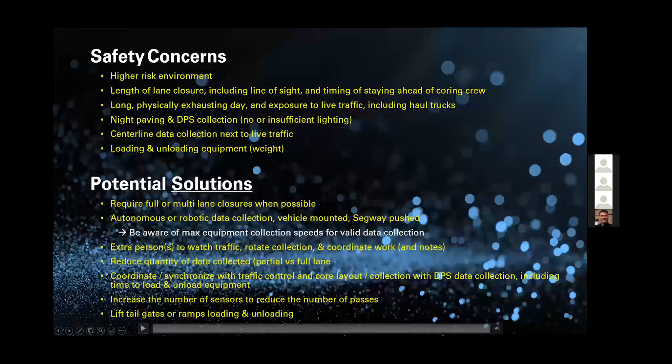Oftentimes additional personnel are needed to assist, whether it's to give breaks or take notes and coordinate the work. Coordination and communication are really going to be key along any of these different areas, because we're going to have certainly very technical users and less technical users for it, both in operating and doing, and potentially even doing some of the analysis.

Related to the safety or the construction concerns, again safety was highlighted repeatedly as the number one concern, as well as limited resources.

This has to do with equipment, personnel, and costs. Contractors are a little bit leery of buying all this equipment, so there's trade-offs that are likely going to have to happen for the contractor.

We know there's going to be a learning curve to all this, and the videos that MnDOT has put together are going to help with some of that. There's also concerns about length and timing of collection, same day or next day, as we already heard. Contract language needs to work out some of the what-ifs, such as rain events, turnaround times for report analysis, and, as Art previously discussed, the sensor consistency.

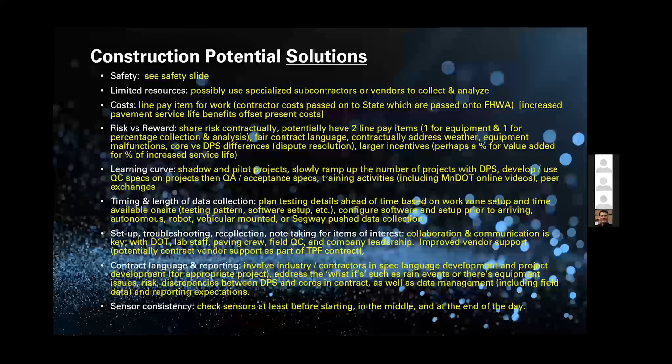Kyle spoke recently about sensor consistency. Most of this has already been addressed in previous slides, so I'm not going to spend time here, but when I refer to these specs with AASHTO, it's really in terms of national specifications rather than those the state DOT would use, related to equipment and operator, rather than all the how-to.

As mentioned, we're developing a gold standard calibration block, and it looks like we're getting there, which is exciting to see. We're moving forward with operator and equipment certification, structuring the certification programs, and working through how many cores you need to get accurate correlations and predictions, and what's going to trigger more or less cores based on those results.

There's certainly the big ever-present question of what to do after a rain event or with moisture in the morning. We'll need to do a little more work to determine exactly how long to wait, or hold off on data collection, if there's a weather event. Is surface-dry sufficient? So there'll be a little bit of focus hopefully at some point along those lines.

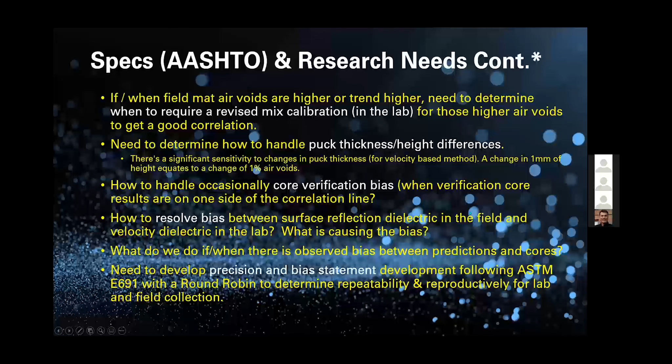We talked about puck height and sensitivity there, so I'll move through that. Some of the potential solutions, since there's going to be a different formatting, is to use the standard AASHTO MP39 file format for the intelligent construction data.

As it looks like Kyle's found out, and the pool fund group found out, the consistency checks are needed less frequently as they've gained experience, and it seems like right here with the fiberglass, that's very promising.

I'm going to jump over to some of the state agency considerations. Kyle also touched upon this, right, we need to be compliant with federal regulations. So if we're going to use the contractor results for acceptance, we need to independently verify those results at some frequency.

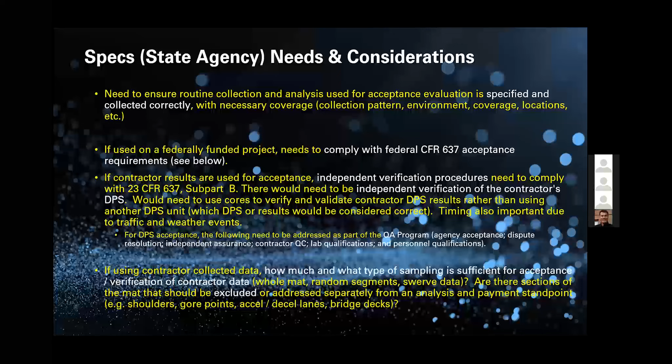Determining how much is going to be sampled and validated as part of that is going to be a big component as well, along with the data and analysis side of things. It looks like we're running short on time, so what I'm going to do is skip through a lot of this and find the things I thought were most important.

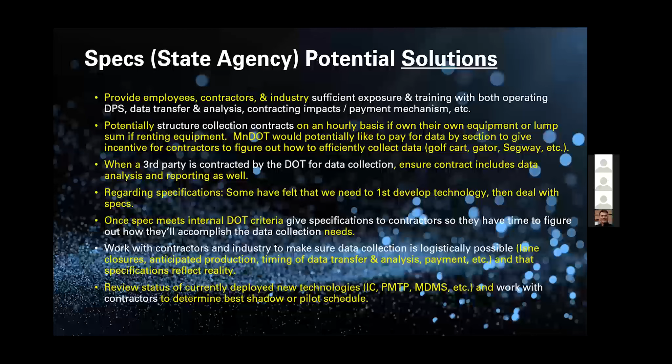As discussed earlier, if you're looking to utilize multiple intelligent construction technologies, GPS accuracy is going to play more and more importance. Depending on how you structure validating contractor results, you're going to need a high accuracy GPS associated with taking the DPS and all their testing.

One of the common concerns too is about vendor support and turnaround time for equipment. There was a lot of feeling that if an agency uses the DPS for acceptance, that equipment has become just as important as the roller and the paver, and that support needs to be real time or parts next day.

So I wanted to touch on that too, because that's going to help contractors feel there's less risk on them when something doesn't go quite right, as well as enabling real-time troubleshooting. Hopefully we can provide enough training tools, videos, documents and workbooks to help minimize the vendor need to do those things, but especially early on, I think there will be a heavy lift there.

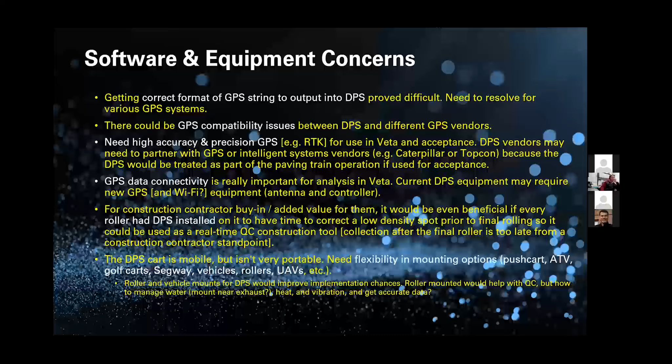Well, thanks a lot, Rob. That was a lot of information and a lot of good stuff. I think it'll be good to have that presentation posted with the meeting notes, because you hit on a lot of really important things and didn't have time to hit on some other important aspects too.

I gave you kind of a yeoman's job to go through, if you guys remember Rob's spreadsheet with all the different comments and challenges and potential solutions that he presented last meeting. That was impressive to be able to get it all summarized in 15 minutes.